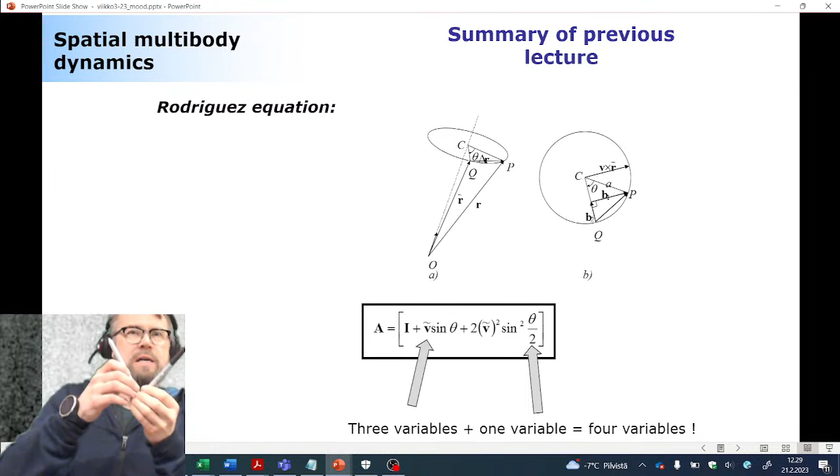So we discussed the Rodriguez equation. The Rodriguez equation is based on the concept that we have a vector like this one here. Then for this vector, we introduce a unit length vector v, and we take hold of this assembly that looks like this. We introduce a rotation of amount theta along this unit length vector v.

Now when we're comparing the original configuration and final configuration of this vector, we can describe the 3-dimensional rotation matrix, which is based on 4 parameters. 3 of them describe this vector v, which is unit in length. The 4th is the rotation theta. But because this is unit in length, these three parameters describing the vector are not free to take any numerical value they want, since this is forced to be unit in length.

So that's where the constraint is coming from. That's the method based on the Rodriguez equation.

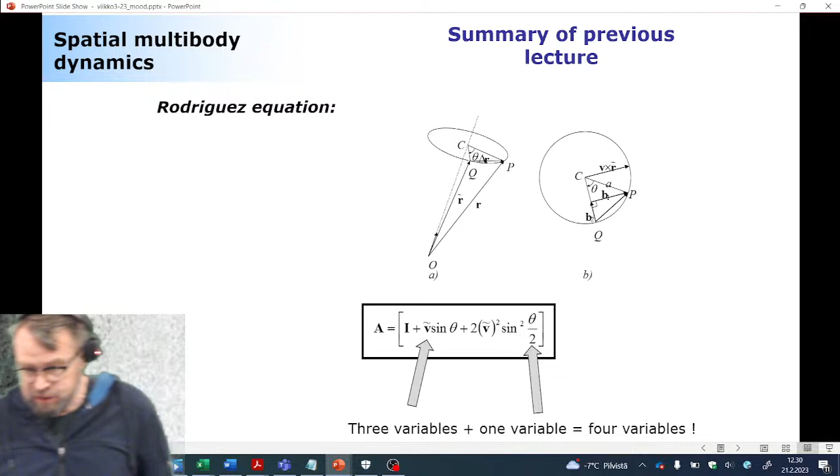And right now, even my pen is not willing to cooperate with me today. So everything is against me today, except Esral. Esral is playing on my team. Others are against me, and you guys, of course. All right, and even the pen is not here.

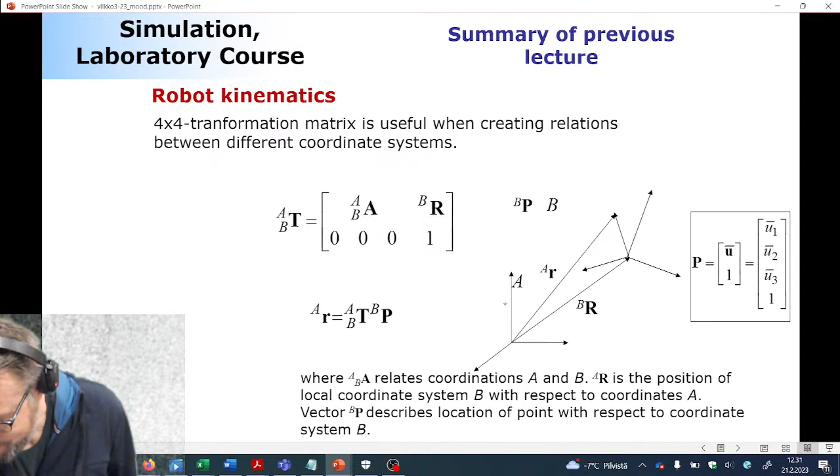Okay, then we learned how to use this in robot kinematics. We learned that there is a method called the 4x4 transformation matrix. Very boring name, by the way — how did they not figure out any better name than that? But it's a 4x4 transformation matrix, which is based on the kinematics of this body reference coordinate system. It's that we're relocating the components of kinematics in a certain way, and that's it. That's all we need to do.

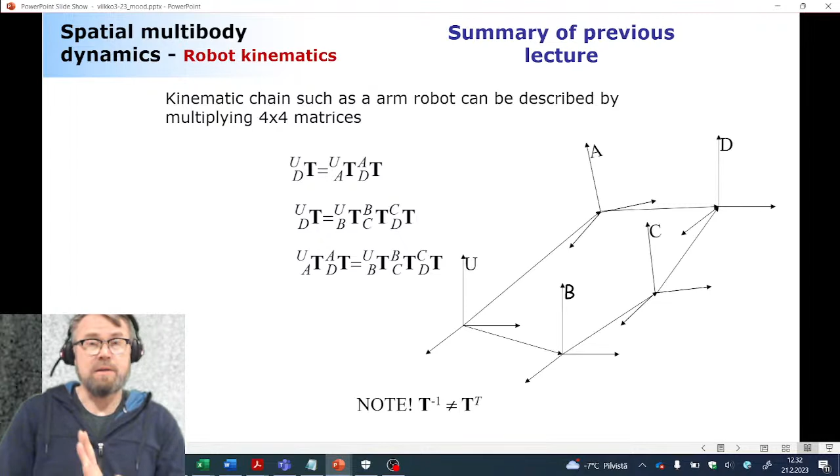And why is this important? Because this describes the relationship between the two neighboring coordinate systems, allowing us to describe the robot kinematics more or less automatically. That's the beauty of the method called the 4x4 transformation matrix.

If something falls outside of this parameter space, then it's a no-go, and you cannot use this description. But surprisingly, once you get used to dealing with these 4 parameters and learn to twist and manipulate your coordinate system, you can practically describe any robotic system using only these 4 parameters. And if you're not happy with that, you can go back to what we did a couple weeks back and describe the method yourself.

The beauty is this: you don't have to call it Denavit-Hartenberg, you can call it by your own name. Think about it, 'Aki's method of transformation' - already sounds good, so it must be very efficient. You can use your own name and make it happen this way.

Remember, this is based on these 4 parameters, and if you're not happy with them, you can decrease the parameters as you wish.

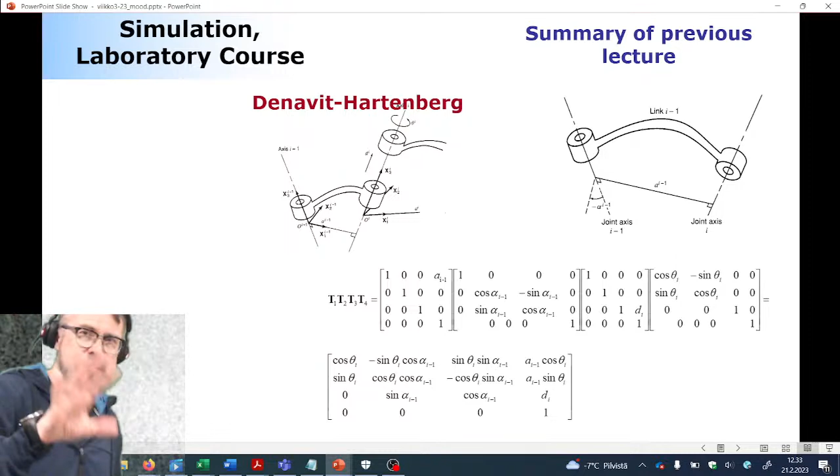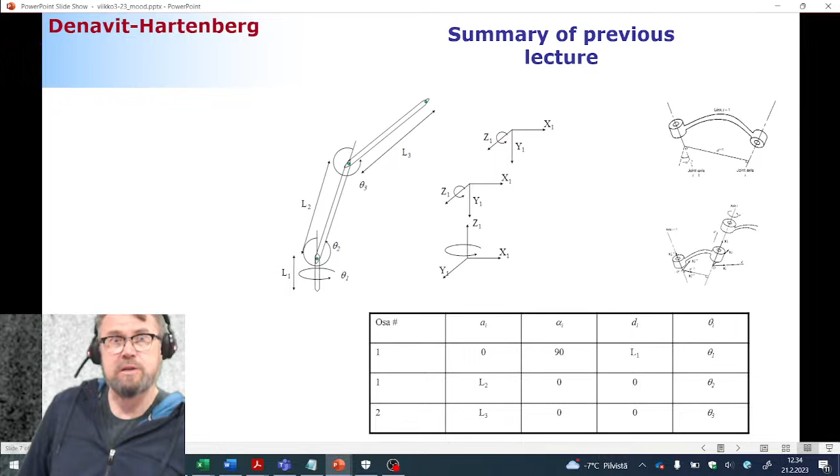Now something surprising, a big problem only valid in 3-dimensional dynamics: if you have generalized coordinates and rotational parameters describing them, they are not the same as angular velocities. It's just not possible to find generalized coordinates that are the same as angular velocities at the same time.

What I learned recently is that there is something called a Lie group, which comes close to solving this problem. But the Lie group is a whole different branch of mathematics. If you really want to commit yourself, you can make nice papers about the Lie group and how it helps describe kinematics. But it's really its own mathematical branch - pretty advanced mathematics, so it's challenging in that regard too.

What we do instead is introduce a relationship between these rotational parameters and angular velocities - this relation is the famous G matrix. The G matrix depends on what parameters you're using, because of course it has different dimensions depending on the parameters. Euler angles use 3 parameters, Euler parameters use 4 parameters, so matching these, you have to change the size and dimensions of the G matrix.

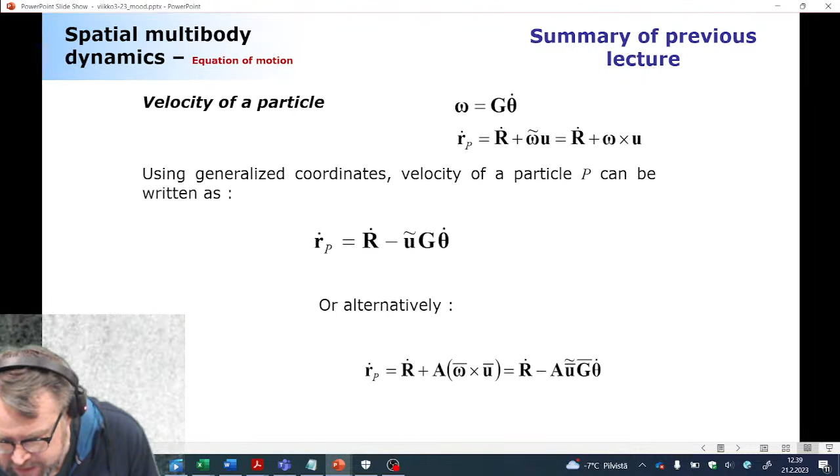But we don't want to use angular velocities because we'd like to use the parameters that we're solving for. That's why the equation you can see here - I cannot touch the screen because it jumps to the wrong place immediately - the one you see in the lower part of the slide.

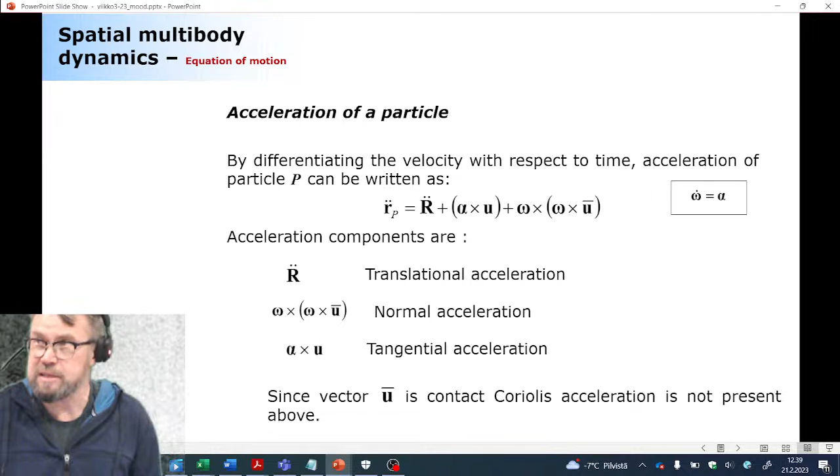When we continue, expressing the acceleration, it's again the same thing, just more complicated - three components like in the case of planar kinematics. Now, if we wanted to express acceleration using generalized coordinates, that becomes nasty. Like you see in the lower part of my slide, when I'm expressing acceleration not using angular velocities or angular accelerations, but instead rotational parameters, it becomes a very nasty looking equation.

Forget about that, because we don't need to look at the details. You just need to know that it's possible, it's doable, and that's it. And it's doable because, again, of this magic G, nothing else.

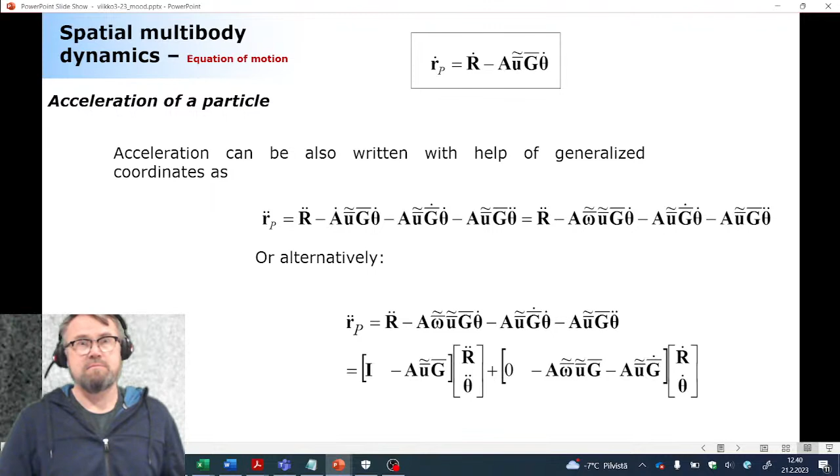The G now finally comes in handy when we're looking at how the inertia, or generalized inertia forces, work. Generalized inertial forces - we first look at how the inertial forces appear in global coordinates, and we map that representation to be expressed using generalized coordinates. How? Well, with the help of virtual displacement.

I'm not going to take a look at the details here. I know that my inertial force is a mass multiplied by acceleration. As mentioned in the upper part of this slide, mass is now integrated over the volume of the body, over the density of the body, and then the acceleration is the one we looked at just a little while ago.

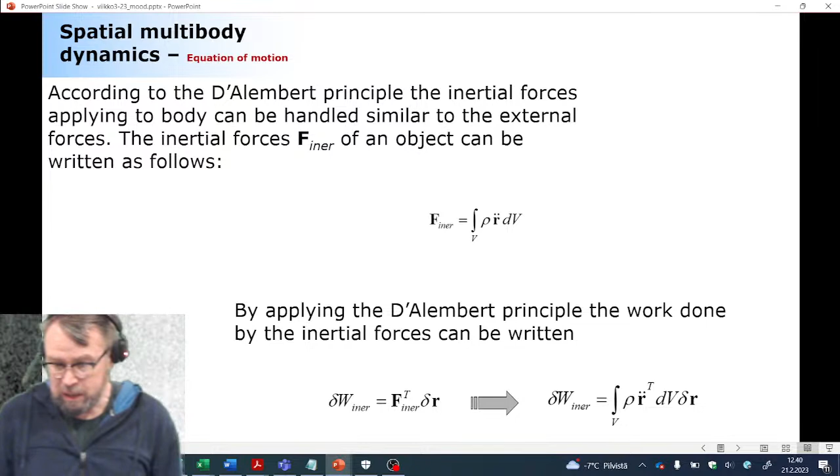Now, when we're using this virtual displacement, which can be expressed using this partial differentiation, I can do the mapping - that's my magic mapping matrix. Using this mapping matrix, my generalized inertial forces look like the one shown in the bottom part of the slide.

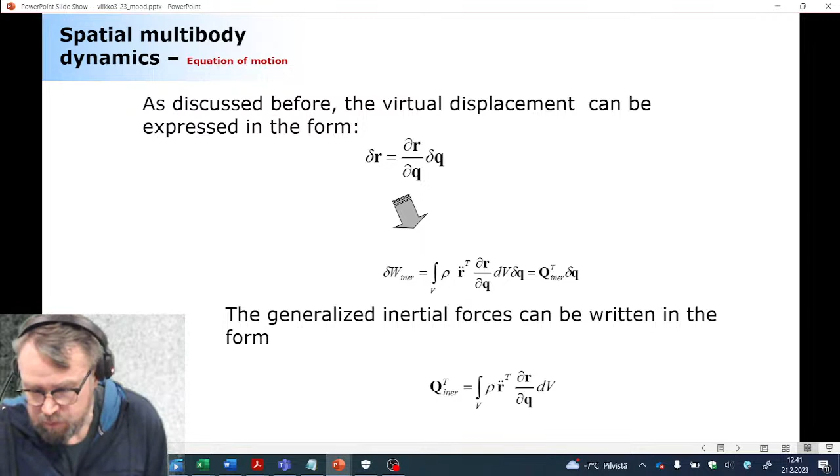Then comes many substitutions, very nasty substitutions, which you should just do - no thinking, just substitution. And then you see how the inertial tensor starts to look. And this is it.

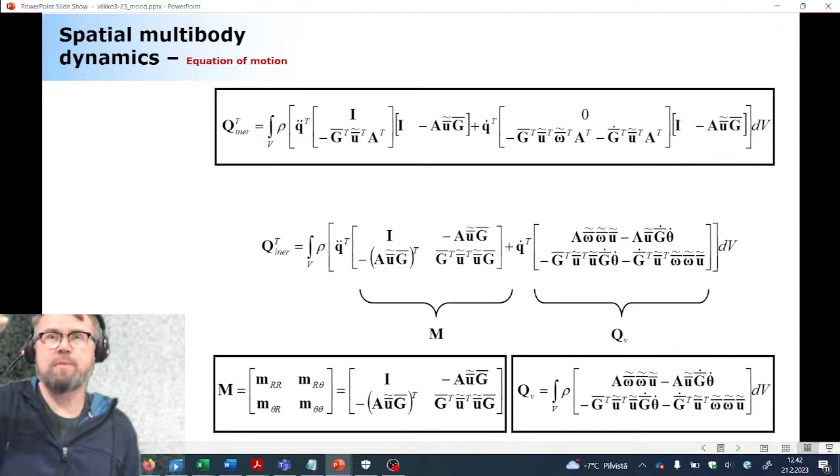This skew-symmetric form of U-bar transpose multiplied by the skew-symmetric form of U-bar, that's going to be your inertial tensor. And now with the help of G, you can describe that using any set of generalized coordinates you want. So it's very mechanical, even though it looked very bad, but it's very mechanical.

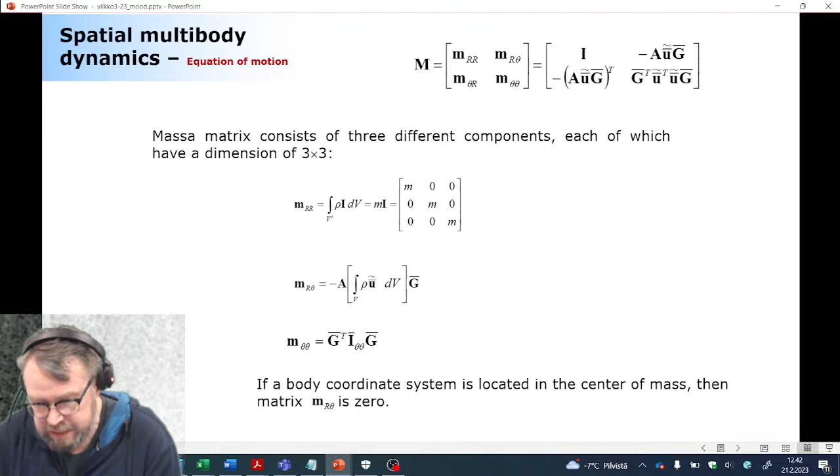The beautiful thing here is the last equation of this slide: G-bar multiplied by the inertial tensor multiplied by G-bar. That's it. The inertial tensor is exactly what I just explained to you.

This is how you can compute it, but you shouldn't. You should take this information from CAD software because it does the computation automatically. This is a serious volume integral over the boundaries of the body, so I don't recommend you do it - it's too complicated.

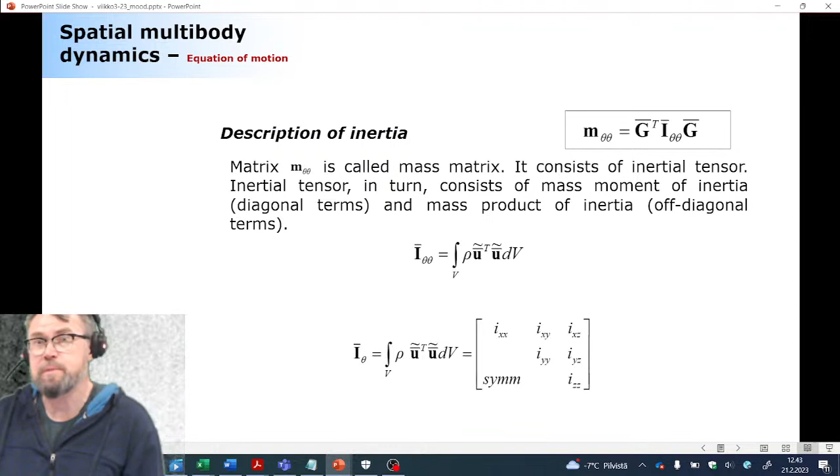So please use a CAD software for that purpose. These are the components, how they look like.

So I have mass product of inertia and mass moment of inertia. Mass product of inertia is located in off-diagonal components. They can have any sign depending on how the body coordinate system is located at. Mass moment of inertia is always positive in sign.

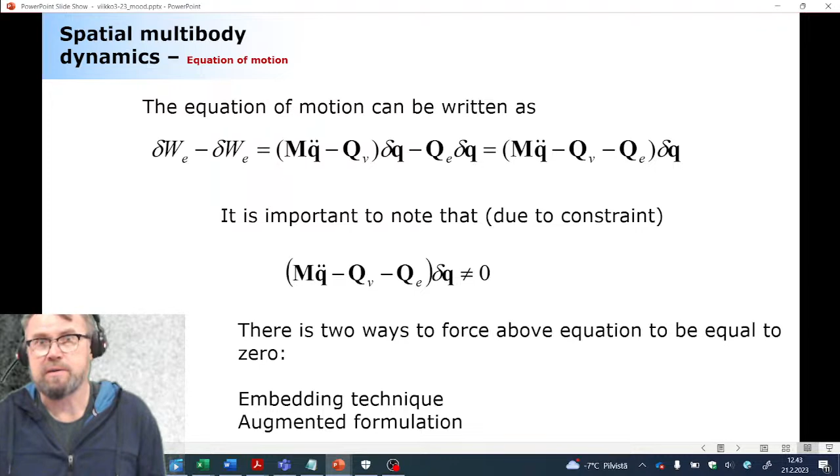And then finally, the equation of motion, we can force the equation above to be equal to zero using two different techniques, either substitution or by using Lagrange multipliers. If we want to use Lagrange multipliers, it's going to be like the one that you already know. No difference in that regard anymore. That's how the equation of motion looks like.

Now, our visitors, I recommend that you don't get started here in three-dimensional multi-body dynamics, but instead you do models that are related to planar cases. As soon as you're ready with your videos, let me know, and I will give you assignments. I will give you a simple mechanism that I'm hoping you to create the equation of motion like the one that is right below the ODE. Solve it using MATLAB, and then you're going to be happy. I will be happy, you're not going to be happy, but I will be happy, and we'll see.

And then I will ask you to do more, because you're doctoral level students, that's not enough. Rest here in the class is master level students, so you need to go beyond that. So then I will give you another way that you can create the equation of motion. But first thing first is to create the equation of motion using this ODE based on Lagrange multipliers. A lot to digest, a lot to learn, a lot of videos to look at, but you can do it.

Okay, and you have, of course, you have the big brains with you, so you have Esral. If any doubts, any problem, here's your guy. He can help.

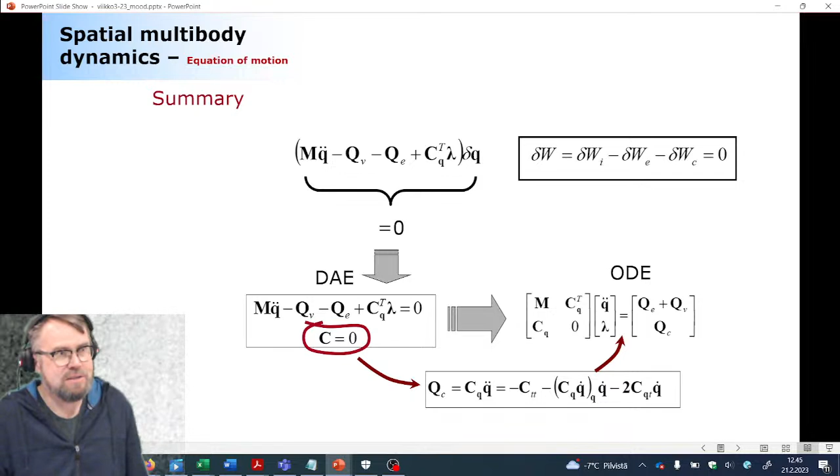All right, now finally we're moving on. So we go with the flexible bodies. I'm going to take just a little bit of time for introduction. And then the main body will be how we can use this magic method called floating frame of reference formulation, and where the floating in the name comes from. Why is that called floating frame reference formulation?

Because floating, as the title implies, is a coordinate system that is not rigidly attached, but is floating with the body. What is that? How can something be floating with the body? So it's either connected or not. And this is not connected, but it's still floating with the body. How come? That I'm going to explain to you next week.

I hope next week. All right, rigid bodies, you know the story already. There's no such thing as rigid bodies, that's an urban myth, a non-existing thing. But in most cases, very often, the body deformation is insignificant in terms of dynamic performance, so you can ignore it. But sometimes when you want to make more accurate models, you must take that into account. And then we're going to take a look at the ways how you can take that into account.

And we're going to take a short look at this method you're already familiar with, the lumped mass approach. And then we're going to take a look at another approach, which is the main body of today's lecture, which is the floating frame of reference formulation.

I got it, I got it. I don't want to show that because I want to show something else. Yeah, I see. Okay, what about now? What do you see now? My OBS? What about now? Yeah, thanks. Thank you very much. Very annoying. What are we gonna do?

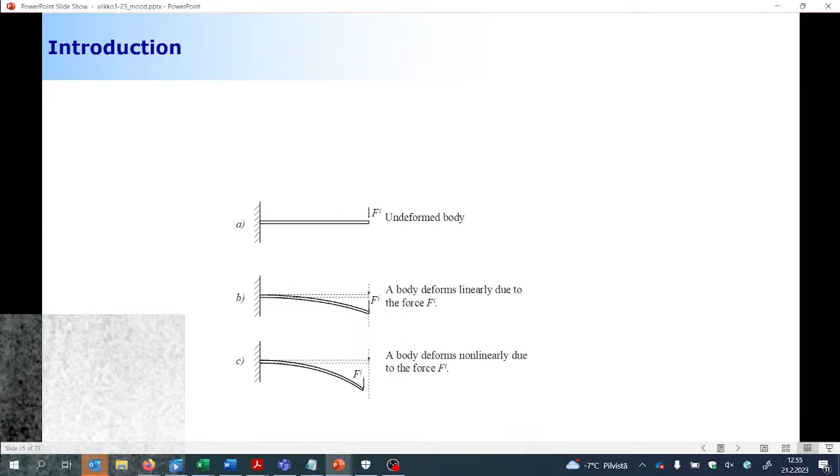Okay, you understand that we are in a University of Technology, and because it's a University of Technology, we cannot by law make these technology gadgets work for us, I guess. I don't know why, but it seems to be difficult for us.

Okay, this is what I wanted to show. Two fields: small deformation and large deformation. Those are defined by how we take the strain-displacement relationship into account.

What's displacement? That's the difference between your reference motion and the deformation. Reference motion is easy to think of as rigid body motion, and the deformation is where the body is actually located. So if this is where the body is rigidly, and where it actually is is the deformation, that difference is called displacement. Displacement is a function of location because it's different depending where you are in the body. At the end it's largest if you look at a cantilever beam, and at the close of the cantilever it's the smallest. It's a function of the body location.

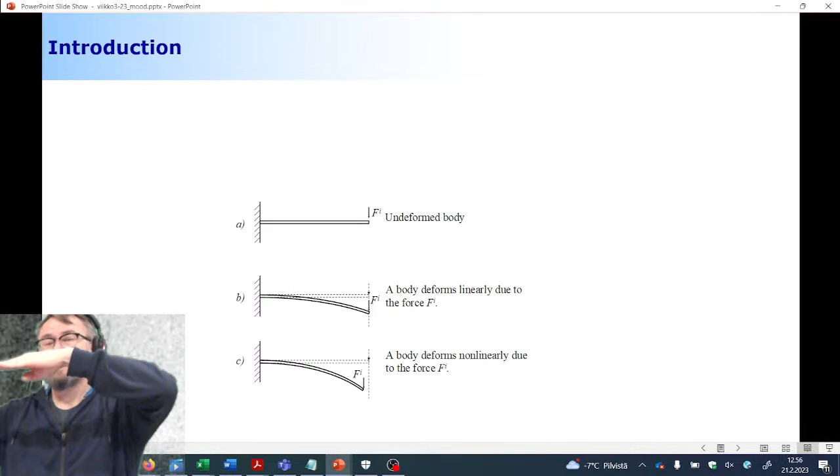This displacement is related to strain. If this relation is linear, then you can only describe deformations that are small. Small means you don't have interaction between the axial motion and the deformation, meaning that if you have a cantilever beam like this, if you load it heavily, this end will stay in the loading line. So it will go down here, which I cannot do with my hand because it's unrealistic.

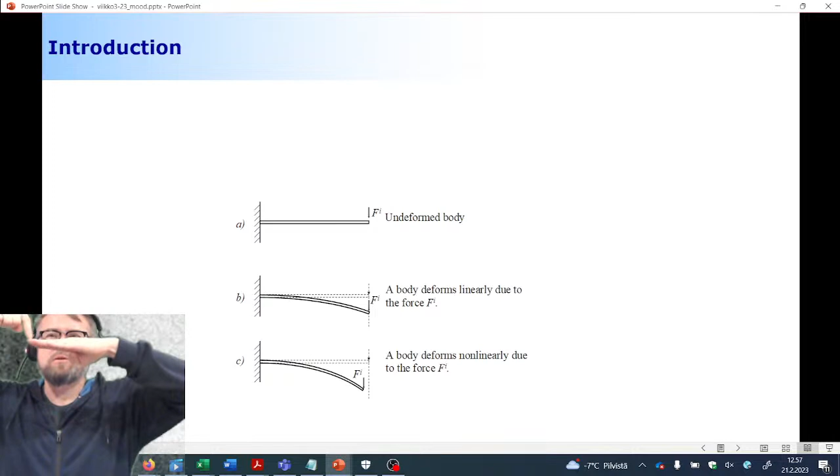In the large deformation case, the relation between strain and displacement is nonlinear. That means that if I introduce a lot of force here, the deformation will be such that there's a minor displacement in my axial direction. This you can only take into account when you have a large, nonlinear description of the strain-displacement relationship.

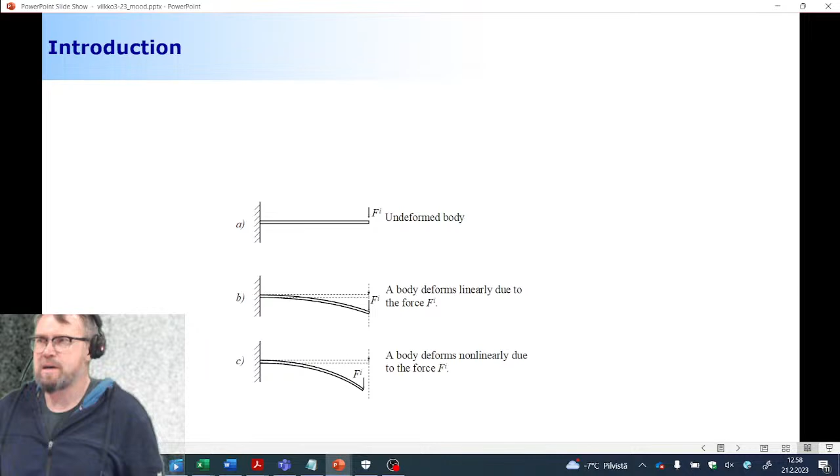What we're going to do in this class is focus on small deformation. Finite element modeling is capable of doing both easily—large and small deformation. But when we look at vibrations, what we are looking at in this class are linear vibrations, so we are not taking this nonlinearity into account. In this class we're going to focus on small deformation cases only, nothing else.

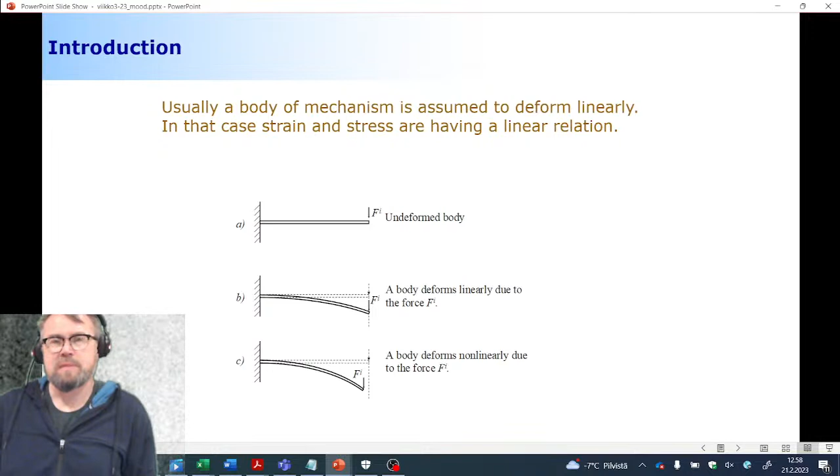Okay, so here's more explanation. You see that in the lowest case, the last picture, the force is so large that the end is moved a little bit in the axial direction. This is something you can only take into account if you have a nonlinear strain-displacement relationship.

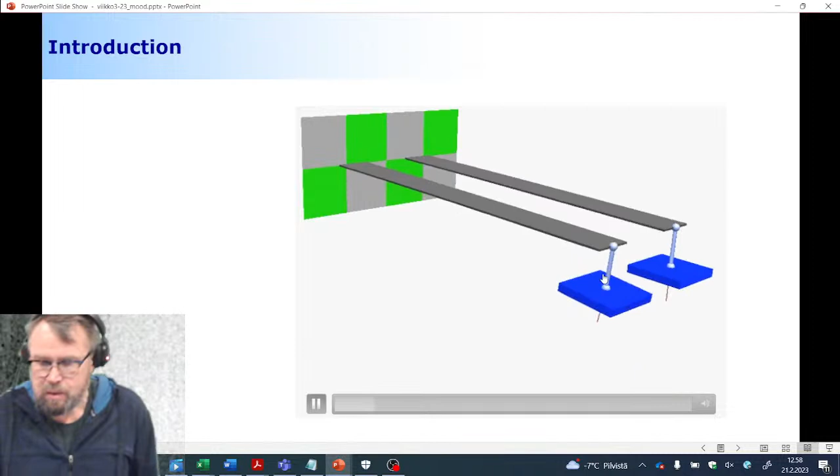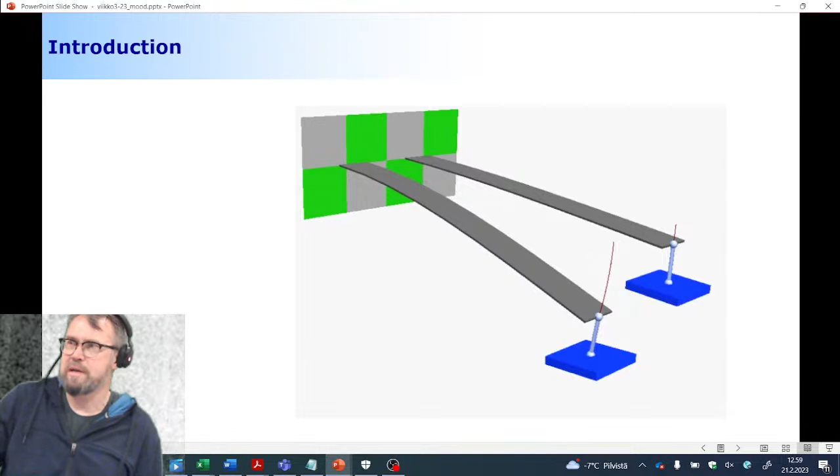Here you see the two cantilever beams. One is assumed to have a linear strain-displacement relationship, the other is nonlinear. The one closer to you is nonlinear because the end of the cantilever moves in a curved path, and because of that curved path it started to move in the axial direction. The other case is small deformation. They look alike, so there's not a significant visual difference, but conceptually they are completely different.

Now, the lumped mass approach—like I promised, I'm going to go fast here because this is something I already introduced in my fall class. Basically, the idea is that we have a flexible body. It must be a beam-like body—it can be a plate-like body, but basically it needs to be a beam-like body.

What you do for that beam-like body is divide this one body into a number of rigid bodies, each connected by a spring element. The problem here is that these springs and masses have very different natural frequencies. Remember we discussed shortly last year about numerically stiff systems—do you still remember what that is?

That is a system that consists of frequencies that are low and frequencies that are high. This is a big problem for a numerical time integration scheme. It's not a problem if all the frequencies are high or all are low, because everything can be scaled in a way that computation will be efficient.

But it's a big problem if you have low frequencies and high frequencies together. That's something the computer simulation will suffer from. You want to avoid it as much as possible because it will make your computation slow.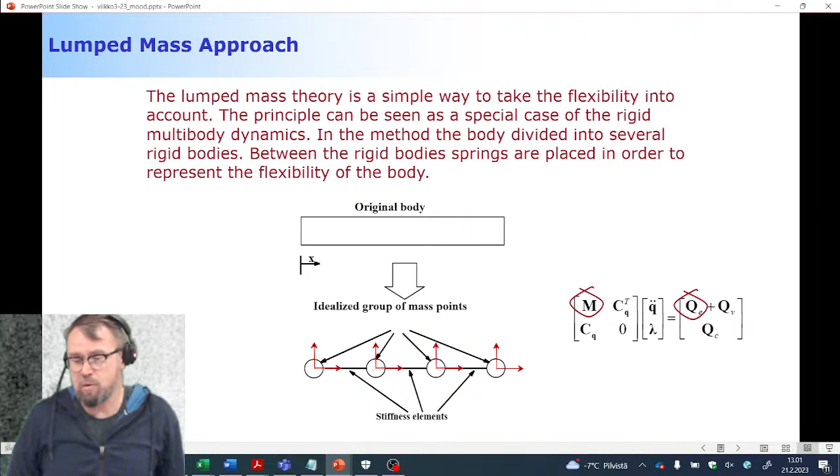That's your problem, because your time integration scheme will recognize the 1000 hertz and tune itself to take it into account, even though we don't care about it—because otherwise it can go unstable, and that's going to be a big problem too.

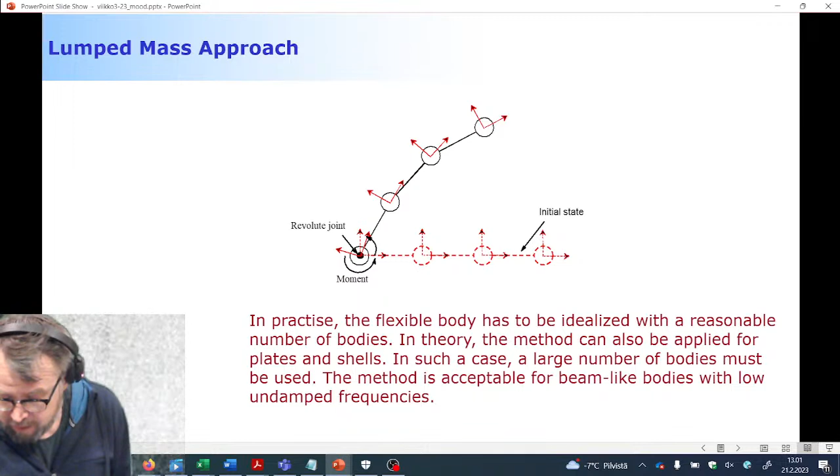It can take different kinds of large deformation into account if you keep on adding the number of rigid bodies, but it's still a little bit artificial.

Here is a couple of videos. This is where you see the wire rope—let me see where the wire rope is traveling now. There is this hook that is moved close to the box, and the wire ropes are modeled using this technique that is based on lumped mass approaches.

And you can see that even this taut string effect is accounted for. You know what this taut string effect is? Something that, I don't know if you guys play guitar.

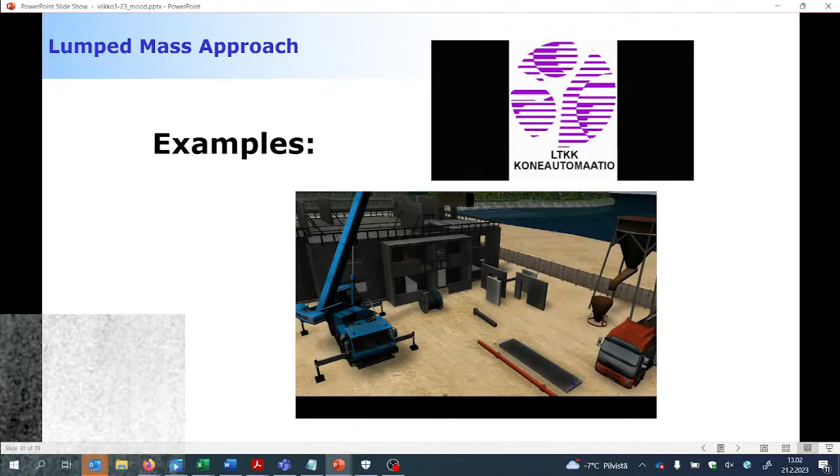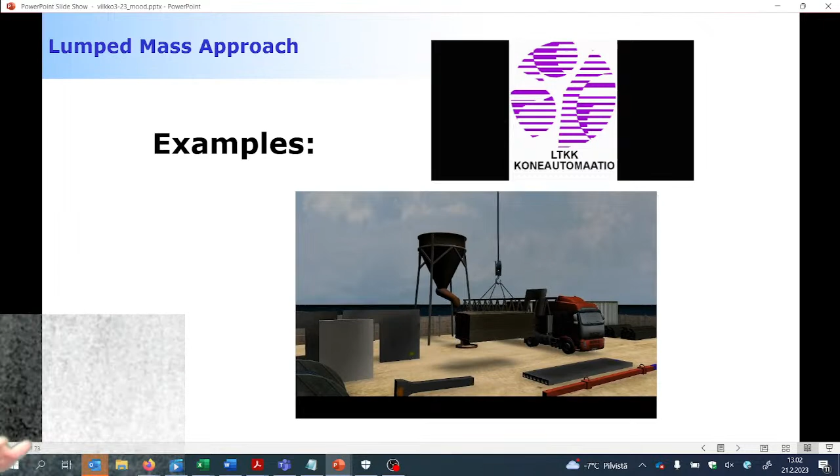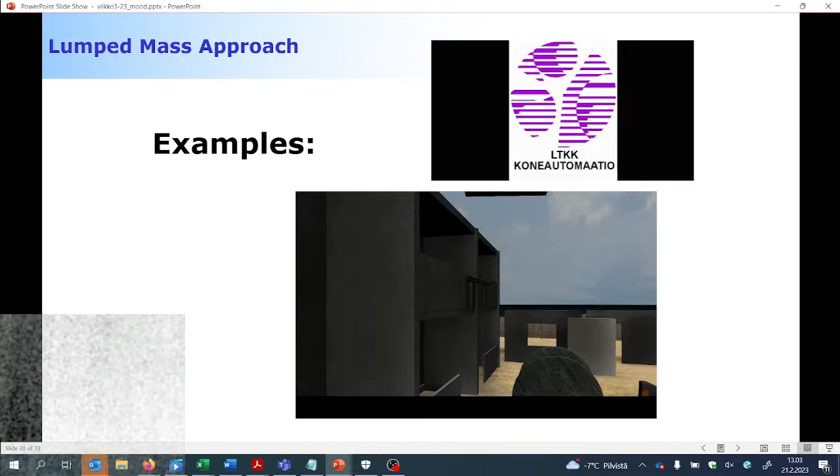Do you play guitar or not? Okay, what you do with a guitar is there are these strings, and how you tune it is by introducing more strain, more loading, more preloading to the strings. Based on the preloading, the frequency will change. This is what you can see in cables too, because a cable with just a hook has a very low frequency, but as soon as you introduce axial loading, the frequency changes, creating a high frequency transversal vibration. That is called taut string vibration, or taut string effect.

Here the cable model is based on the lumped mass approach.

Here's another video which is more than 25 years old. This is the crane that we still have in the lab, and now the crane is modeled using this lumped mass approach—that's how flexibility was accounted for at that time.

Still, lumped mass is okay in the cable models. There are better cable models available at the moment, but it's an okay approach.

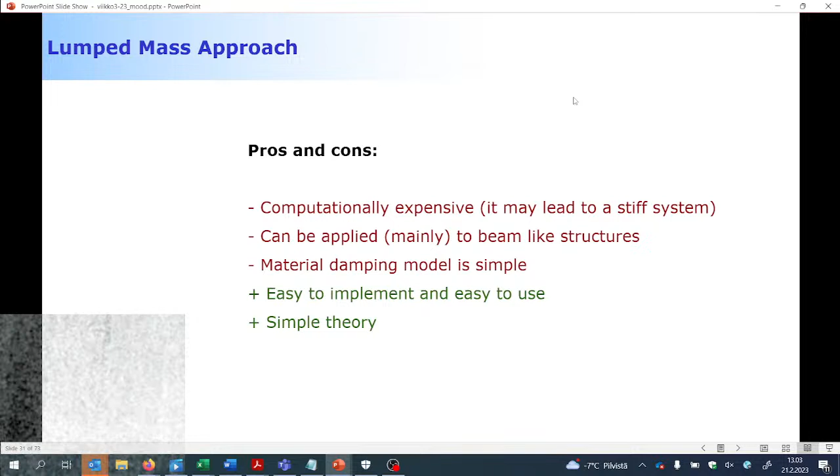All right, computationally expensive—that's what I already mentioned, so it can lead to a stiff system. It can be applied mainly for beam-like structures only. Material damping models are not very advanced, but it is easy to implement. The theory is very simple, but that's not what I'm trying to explain here.

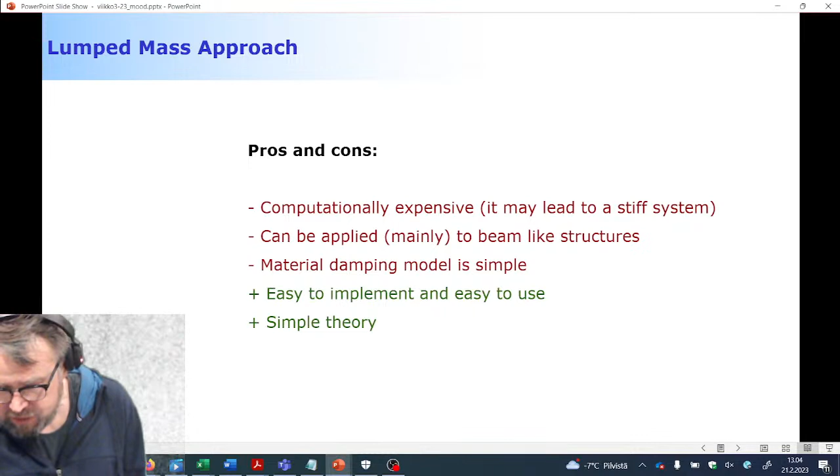Another in-class quiz. Numerically stiff system means what: that the system contains low and high frequencies, that the system contains high frequencies, that all bodies are assumed to be rigid, or that some of the bodies are assumed to be flexible? Four choices—visitors are voting.

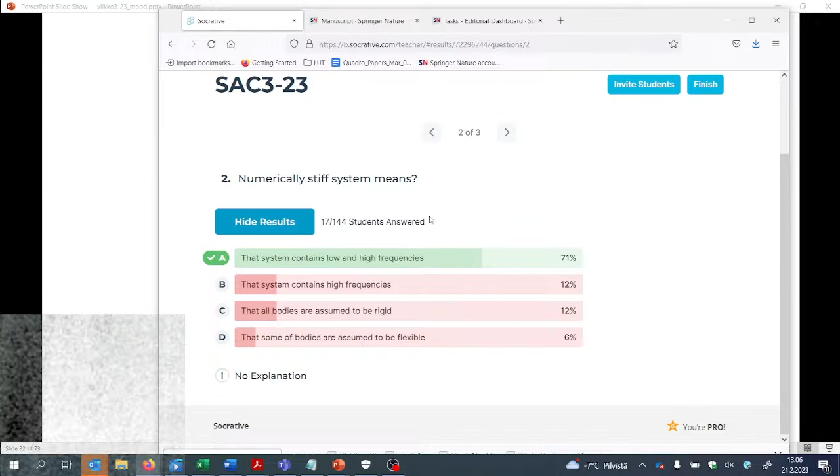Okay, moving on, back to my slides. Now we're going to take a look at this floating frame of reference formulation, and we're going to take a look at the description of deformation, and I think we have time to do that as well. All right?

Now, the floating frame of reference formulation, a few notes before jumping into the topic, is taking the best from finite element modeling and from multibody system dynamics. You know, multibody system dynamics is very good to describe large translations, large rotations. There's something we can call reference motion.

It is almost okay to say that it is rigid body motion. Even though I've heard arguments that there is no such thing available here, rigid body motion. Okay, yeah, I understand that, but you understand if I say rigid body motion and when I call it reference motion, those are the same thing. Because human brains find it easier to understand rigid body motion than unclear reference motion. Okay, rigid body motion—that's where multibody system dynamics is very good.

Finite element modeling is very good at describing small deformation with respect to a reference coordinate system. So what we can do is take this ability to describe large translation and rotations and combine it with the ability to describe small deformation with respect to this reference coordinate system. That's all we need to do.

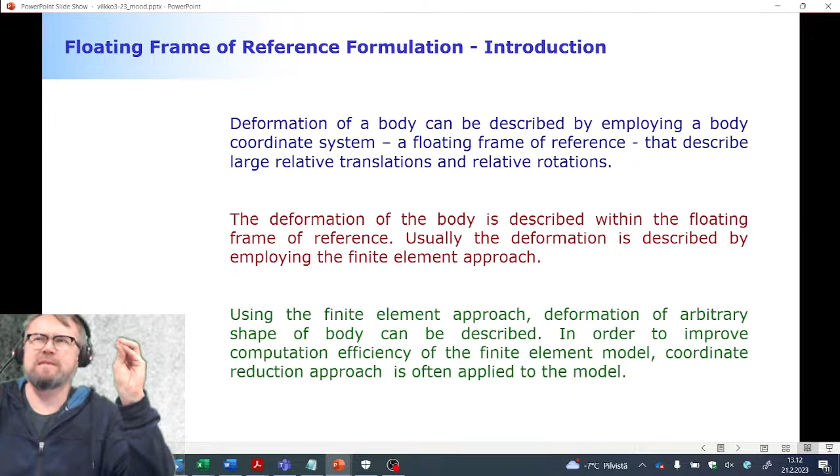So that's how we're going to get started. First thing first: the floating frame of reference formulation is now based on new kinematics. So we have to change the kinematics. Very bad news, because remember what we did in the very beginning—we said these are our kinematics, and we cannot change it afterwards. Now we're going back to the beginning, and we say, instead of having this kinematics where we have a u-bar...

We have u-bar 0, which describes where the particle was, and u-bar f, which describes this displacement. Now, because the kinematics has changed, everything needs to be redone. We have to do everything again: constraints, inertia forces, and so on and so forth.

But we are not going to take a look at that in detail. We're just going to know that the kinematics will be different, and then I'll give you what it means and how it's going to look. We're not going to look at the details anymore—if you wanted to torture yourself, you can take a look at the lecture notes. All right, but nothing else.

So now we have a new kinematic equation, which consists of capital R, describing the relation between the global coordinate system and the body reference coordinate system. Then we have a rotation matrix describing three-dimensional space. And then we have a vector u-bar 0, describing where the particle was when there was no deformation whatsoever. And then the displacement.

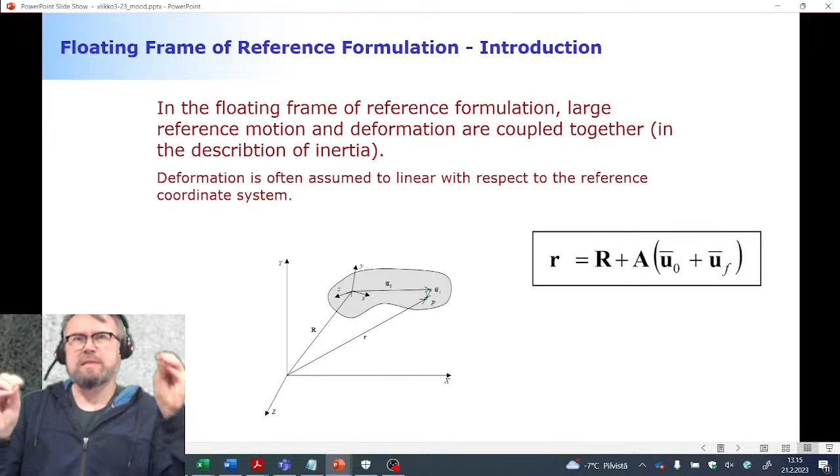And that's how we're going to do it. So like I said, we're going to take parts of finite element modeling and parts of multi-body system dynamics—that's what's called the floating frame of reference formulation. And it can be used for a wide variety of applications.

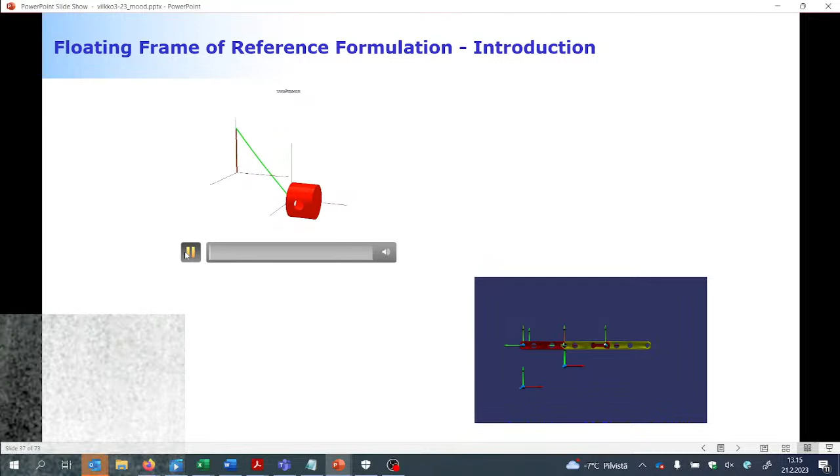This is, maybe, remember, a very early development for our company when we look at spatial bodies and how they deform in different cases. This was a three-dimensional crankshaft, and you see that the connecting rod was described as a flexible body.

This is something that Dr. Pasi Korkealaakso was involved with, about the sliding joint. Sliding joints are still very unpleasant to describe using these modes, because their contact points keep changing all the time, as will the frequency and the properties of the structure.

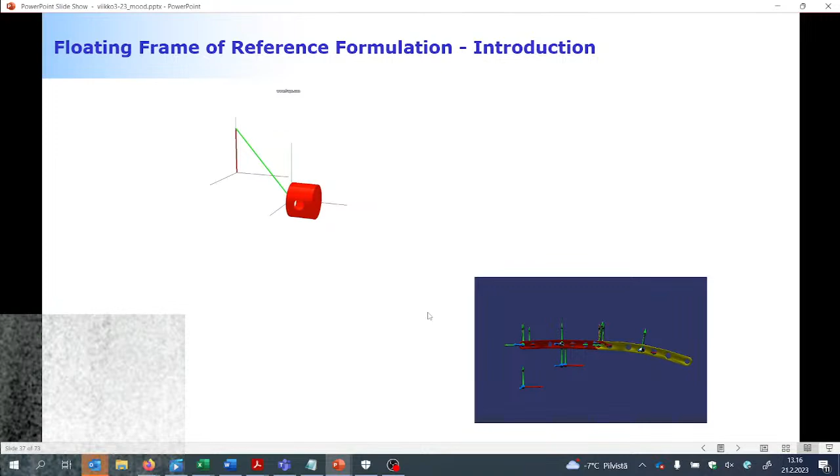Okay, that's a floating frame reference formulation. Now we're going to first take a look at the first part, which is this deformation.

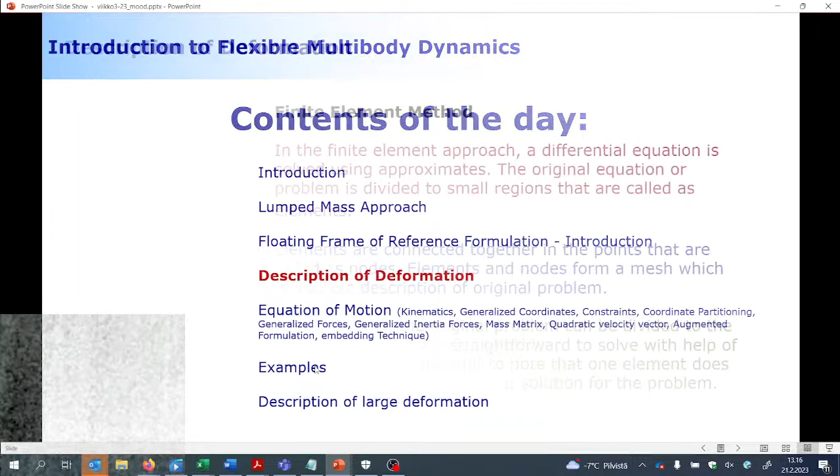All right, and we're going to take a look at the finite element method. Finite element method is a foundation here. How many of you know the basics of finite element method?

You guys, are you familiar with the polynomials? Not polynomials. Loading cases, okay, very good. So what course was this polynomials? Was it Marco's course, or who was the teacher at that time? I don't even know. Timo Björk. Okay, very good, very good. That was a bachelor level course?

Okay, maybe for you guys it's going to be too simple of a thing, but we'll see. So we're going to get started in this finite element method, which is a method where we divide the structure into small elements. These elements do not represent the correct solution, but a piece of the solution. When you keep on adding these pieces of solutions together, you can get a better and better solution. So this is called convergence.

Finite element solution, when you use an overly low number of elements, is typically too stiff. Not necessarily, but it's typically too stiff. But it becomes more and more accurate when you keep on adding the elements. And how fast you can get the acceptable solution is called the convergence rate. How many elements are needed to get an acceptable solution? Heavily case dependent, because different cases need a different number of elements to get acceptable solutions.

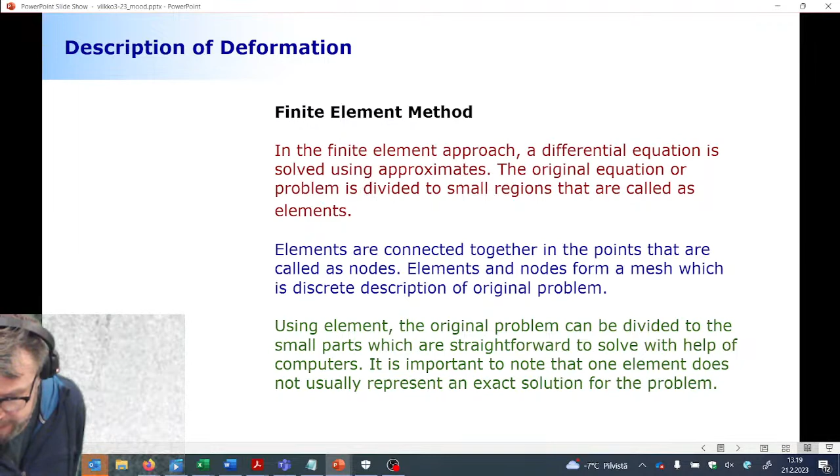Now, based on your experience from the class you mentioned, are you already able to answer those three questions? More or less. I just checked the bachelor's degree courses, and there is no talk about Pascal's triangle.

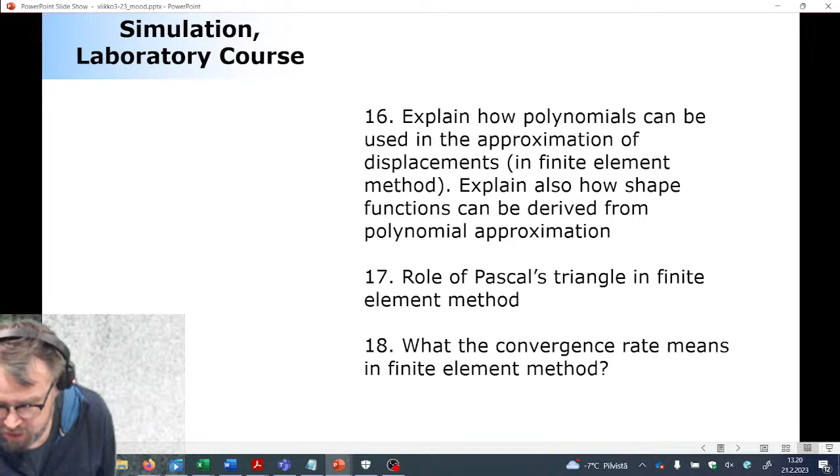Very good, very good. So those of you who are selecting the specialization of steel structures already know the basics of finite element modeling. I'd say that's good news for you. We're not going to spend that much time on the basics of finite element method, but it's good that you can refresh your mind about the basics, how the polynomials go. All right, the Pascal's triangle is important too.

All right, let's take a look. So let's take a look at this polynomial business. And we're going to get started from the simplest element you can think of. So the element that can only get shorter or longer. A spring, if you may. Spring element.

And the spring element is something that consists of two nodes, one at both ends of the spring element. These nodes, one on the left-hand side and one on the right-hand side, can only move in the longitudinal direction, meaning that this node only has one degree of freedom, and this node also has one degree of freedom, because it can only move in this direction, plus and minus.

So no motion in transverse direction is allowed. This is maybe the simplest possible element, so this is where I get started explaining the role of the polynomials. What we do in finite element modeling is describe the displacement in all the points in the element.

Let me emphasize this, all the points in the element. Remember when we looked at the cantilever beam, the displacement changes as a function of the beam length. Same also in the spring elements, the displacement is not constant, but varies depending on how you introduce the displacement.

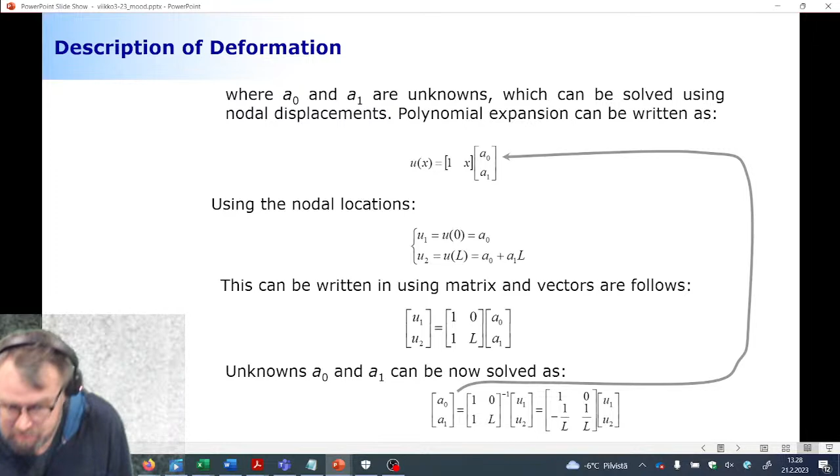Now, once we do this substitution, we can get something extremely important: shape functions. Shape functions, as the title implies, tell us the shapes of displacement when we have a nodal displacement. So if I have left and right side nodes, and I'm moving the left side node in this direction or that direction, how do the particles between these two ends move along with this displacement?

That is described using simple linear polynomials. Here we have linear polynomials, but in a general case it's way more complicated. We may need to make an assumption about what the deformation should look like. These shape functions allow me to create all the properties I need in my computation: the stiffness matrix, which relates forces and displacement, nodal displacement and forces, and the mass matrix if I want to compute natural frequencies.

For natural frequencies, I need to know the mass and stiffness. That relation tells me the natural frequency and natural deformation modes associated with these deformations. In this case, it's kind of unrealistic to show what happens to particles between the two nodes, because it's going to be linearly distributed. Displacement will be linearly distributed. Very simple case. But the information I was after is shown in the first equation of this slide, so I'm able to get this N, the shape function matrix.

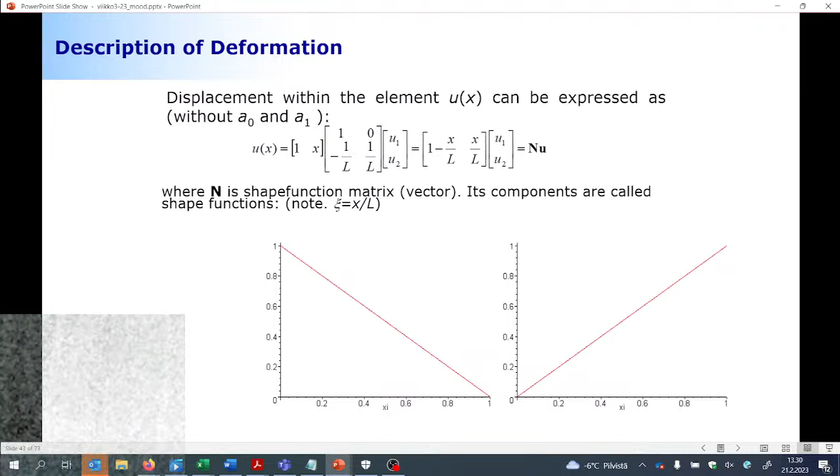Now comes the next in-class quiz, but I need to explain this to you first. How can I make the writing work? Right now I just need to do the writing here. Let me check if there's something else I can do. Yep, all right, you see the writing now.

Okay, very good. So look what we had in a previous slide. Let me take this slide here. There were two nodes like this, and each of them can move left and right, so that's 1 degree of freedom for each of these points. What happens to my polynomial expansion if I keep increasing the number of points I'm interested in? Let's say here in the middle I have a node that too can move left and right, so that would mean I have a total of 3 degrees of freedom.

3 degrees of freedom. And remember how I started my polynomial: this was the first component, this was the second component. Guess what will be the third component?

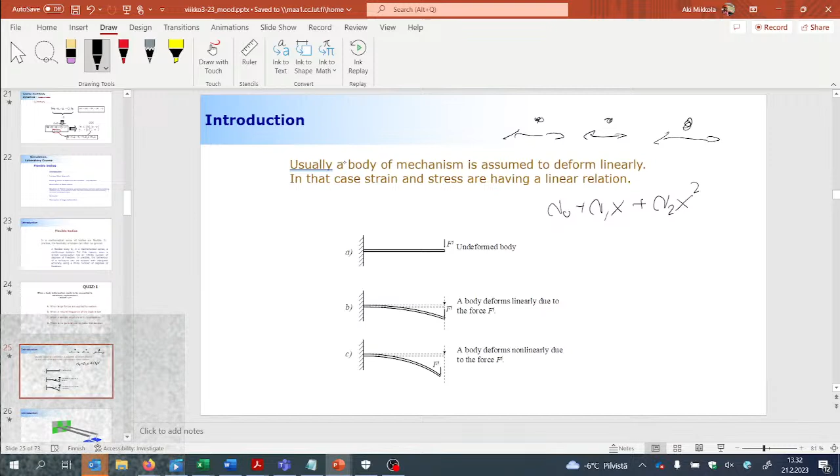A2 multiplied by x squared. Correct. Now if I would add more components here, if I would put the 5 nodal degrees of freedom, what should I do to describe that? I can increase the number of polynomial components here. So it's going to be, let me add it here, A3, correct. And then like this, A4, x power 4, so on and so forth.

This is what I did. Where is this coming from? Well, this is obvious, but in a three-dimensional case, and generally speaking, they're coming from something called Pascal's triangle. And this is very important in terms of how the element properties are, how they perform, and how we know their convergency properties.

Pascal's triangle is like this. In two-dimensional space, it's like this. So this is x - sorry, that's a little unclear writing. This is y. That's my first row, or second row. And then I continue like this, and then a little bit more like this. Okay, this is number 2.

Now look how I select my components here. I started here, so I need to take this one into account because this is the one that describes large, or let's say rigid body motion. So if you don't have the one, your element will introduce strains depending on its original configuration, and that's unrealistic.

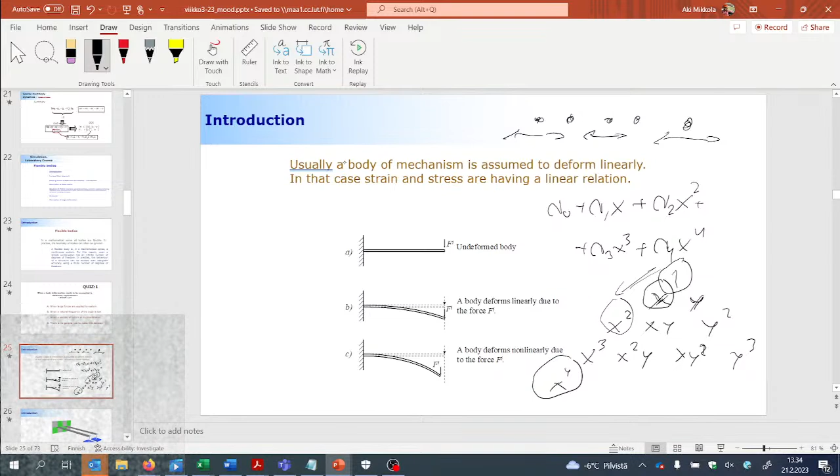What's the trick? What's the big property, the big benefit perhaps? The big benefit is that if you're not choosing your elements according to the list, but skip some of them, you might get an element whose convergency rate is better than selecting them in a row. This is a bit of a game you need to check, and there are several different checks for each of the elements that allow you to do this checking. But typically, skipping some of the components increases the convergency rate.

And convergency rate again means this: say this is a cantilever beam, a very simple case - you can get the correct solution using one element only. But let's say a more advanced case, and let's say the real answer will be u equal to 1, hypothetically. So this is 1 here, and this is the number of elements. How many elements do you need to get this absolutely correct solution? Typically the finite element is converging like this.

And convergence you can check by taking two consecutive solutions, like the one here and here. If they are not the same, you keep increasing the elements until you get two solutions like this one and this one, where you see no significant differences anymore. So you can be guaranteed that this is your converged solution.

The minor problem is that certain elements, particularly non-conforming elements, may have a convergency property that comes in here, or they might even oscillate around the correct solution like this. Then it's not even guaranteed that taking one solution here and another solution here, you can accidentally say, okay, they're all the same - still incorrect. That's very bad luck, but it can happen.

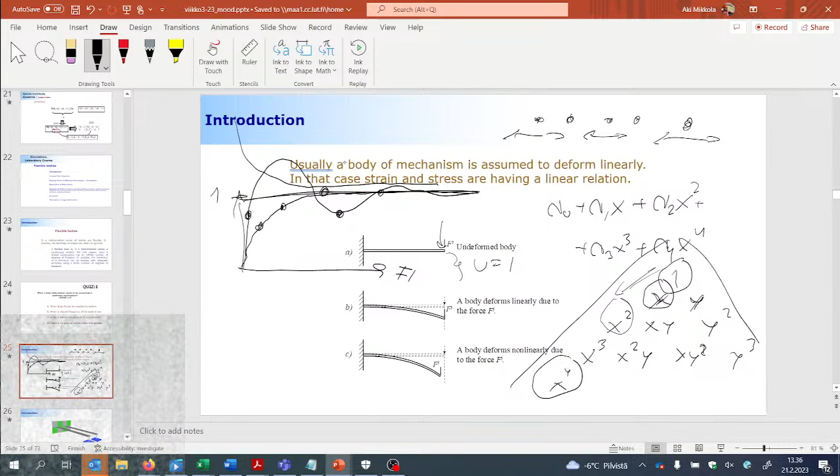It can happen. Okay, this one here is called Pascal's triangle, and this is how you select your polynomial coefficients. And as tempting as it sounds to take the components in a row, that may not be the most efficient way to use in practice.

Some of the well-performing elements, like my famous 48 by 48 elements, are non-conforming, meaning I was selecting this and this, but then there were very high order components because they were the only ones able to do the things without singularity.

Very bad explanation, but it gives a properties element that it was performing okay. Later, of course, we figured out that this element too was suffering from these lockings that was being pointed out by Jussi Sopanen.

Okay, so now I was able to do this writing. Let me take myself back here.

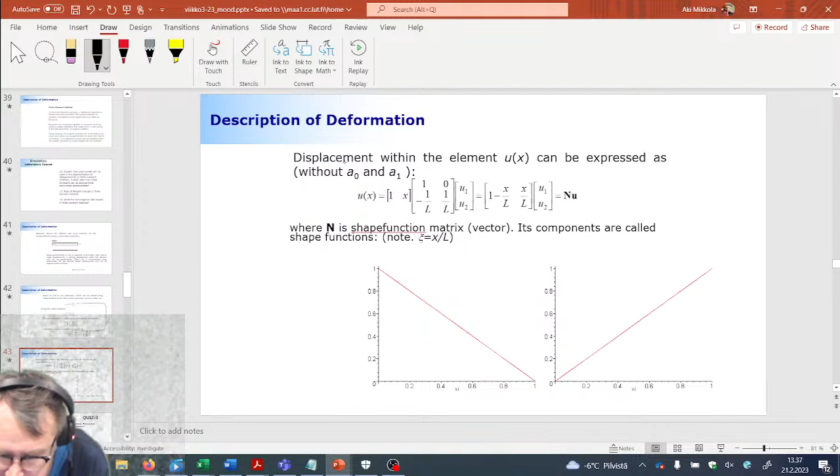Now, 4-node spring element where the nodes can move left and right only. What kind of polynomial expansion can I use? Only one is correct. Now you need to take a look at the number of polynomial components. Which one is correct? So the Socrative is not on. This one.

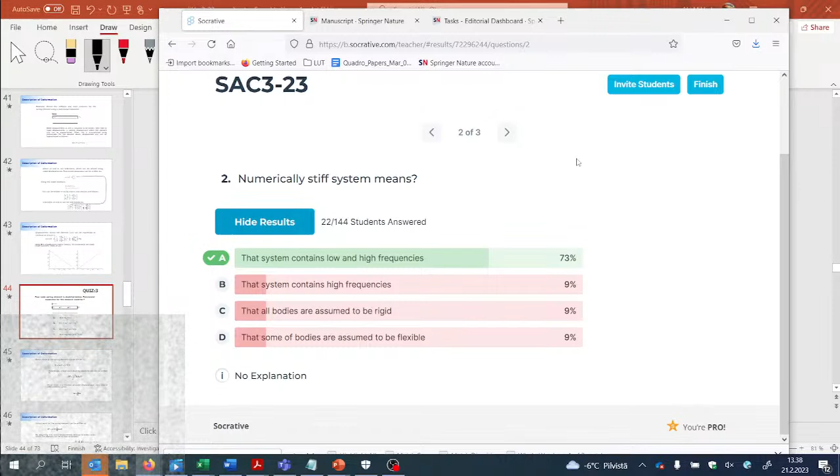Four-node spring element shown below, polynomial expansion for the element could be. Not necessarily, but one option; other options are not possible. Why not? We're going to learn that momentarily. You can read by yourself because you see the slide, right? Right? Yeah, very good.

Okay, Team Malaysia is voting what? Not easy. So this is not the easy game. And this is why we don't really score 100%.

But that happened too last year. And there was a lot of dancing afterwards. Me dancing, they're watching.

Okay, only one is correct. So what can be the correct polynomial expansion? Team Malaysia is voting A. So that's A0 plus A1 times X. Okay?

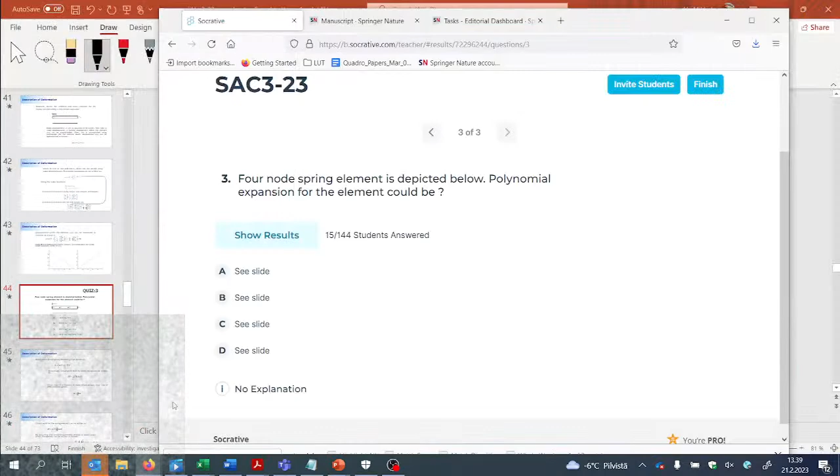Oh hold on, sorry, I'm in an incorrect place. So this one. Oh, how come we got more students around? So now we have 15 students.

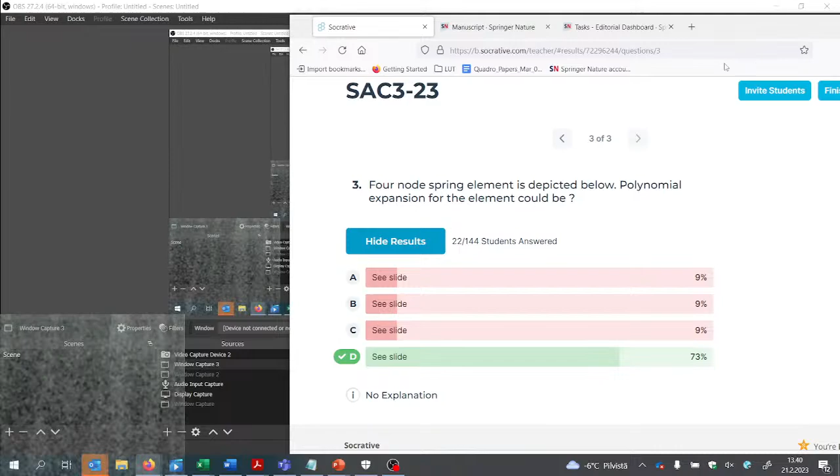Correct solution is D, because the number of polynomial coefficients, the number of degrees of freedom, must match. Otherwise this is no go. Because what we wanted to do here, remember our mission: our mission is to replace this polynomial expansion, this polynomial coefficient, by nodal degrees of freedom. That's why the number must match.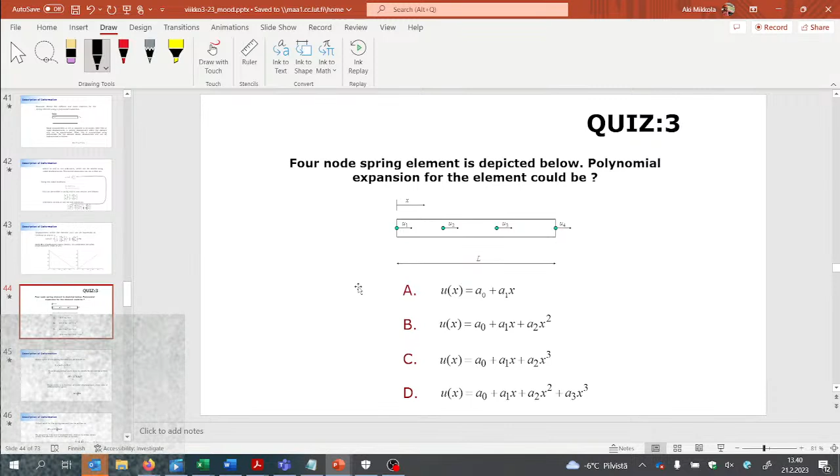Very good, very good. Okay, so now what follows is that because now we have this information, we can compute the stiffness matrix. We can compute everything else we needed.

And the rest shown here, I don't know if this is very important, but this is just showing how the elastic forces of the spring element can be computed. You see that the elastic force is such that it is a volume integral over the stresses. I think you can simply skip this, it's not so important in my mind.

You know that the stress is equal to the displacement, the strains multiplied by the elastic coefficient, which can be a matrix representation too. Now when using the virtual displacement, this can be expressed like this. Again, don't memorize this, it's not important for us. This is just the details of the finite element method, we don't need to know that much of the details.

But what we do need to know is how the strain and displacement are related. We can compute this relation by using partial differentiation. Look at what I'm differentiating here: shape functions. So I must know the shape functions, what I'm assuming the particles between the nodes are doing, how they're behaving. Once I know that, it gives me the possibility to compute this partial differentiation of the shape functions, and that's all I need to compute my stiffness matrix.

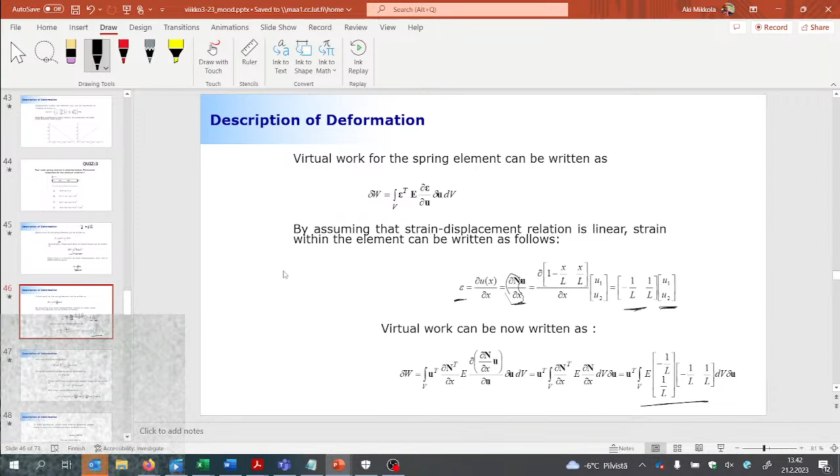And my stiffness matrix eventually looks like this. This is it. Again, let me summarize: we started from defining the nodal degrees of freedom.

So we realized that there was a 2 degrees of freedom element. So we described the displacement at all possible locations, because X started here, all possible locations, not just the ends, by using a polynomial expansion. And we realized that polynomial is not the way to go, because these coefficients don't represent anything physical. Their physical interpretation is non-existing.

So I'm not happy, I wanted to make this more user-friendly. What I did was replace them by, say, shape functions. And what happened then was that I was able to express the displacement at all points, not just the endpoints, by using these shape functions and a vector of nodal coordinates. A vector of nodal coordinates was this guy here and this guy here, the nodal points. This is a vector or matrix that tells me the displacement wherever I'm going.

Okay, then I was able to relate this with strain, and that was needed to create my stiffness matrix. And finite element modeling most often is all about solving this.

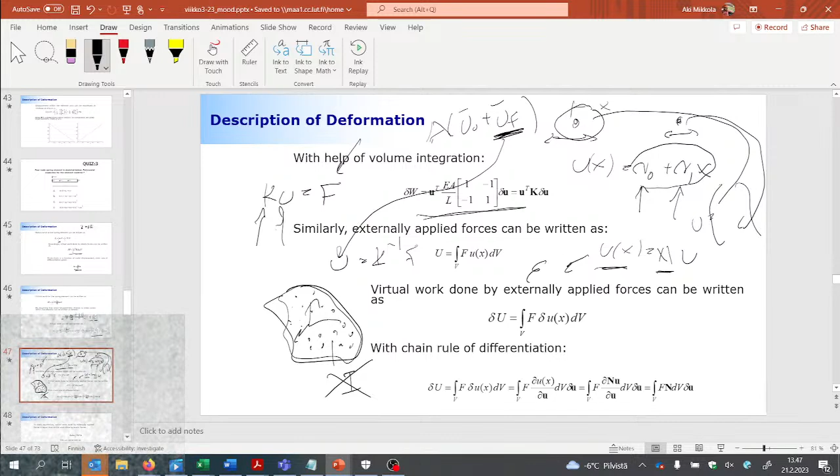Maybe it can be a mathematical match if you come and do your doctoral dissertation in a way that makes that match, but there are still papers being published on this subject, so it's not a simple thing. Because what we do here is compromise the inertia description.

What's important in dynamics? Inertial forces and externally applied forces. Now, if we're compromising inertia, is that serious? Yes, it is serious. But in practice, the difference is not that bad, so we can still live with that.

Very good. Mustafa is here, so are you saying we need to go? My lecture, oh my God, this is too much. So each of us, should I go also to one lecture here? Not mine, but something else.

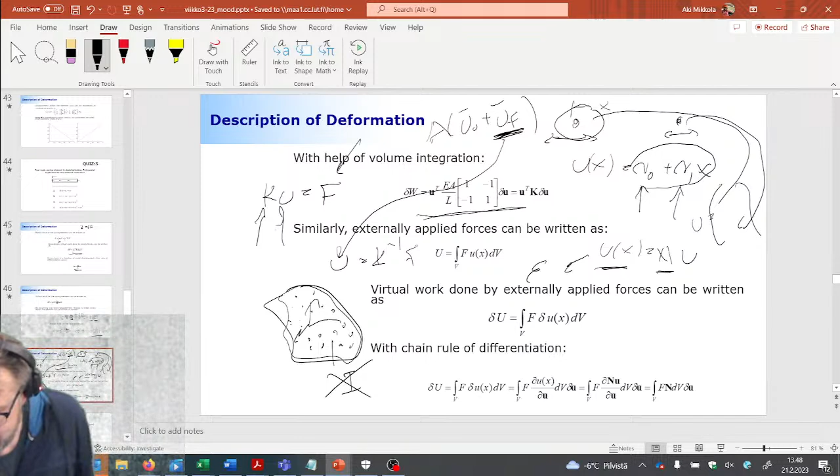Not much, but we're going to take a look at the beam elements. Here's a beam element. Beam elements, the shape functions and polynomial expansions, will make more sense. They are more clear. All right, so that's where we continue then on Tuesday.